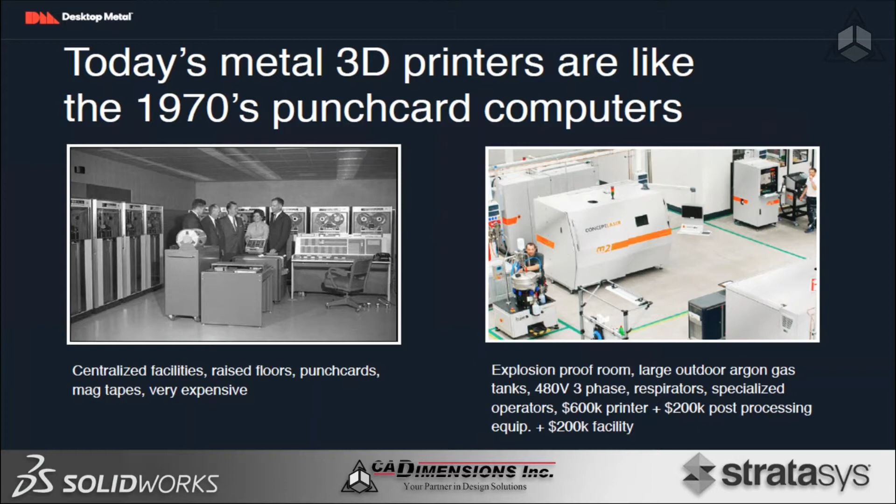So Desktop Metal was a company that was really started to take on these challenges, to be able to offer something to the manufacturing world that wasn't available currently today. So when they looked at the main challenges facing the metal 3D printing world, it was broken down into 4 different areas.

The first is the high cost of acquisition or ownership. If you're not aware of metal 3D printing, the current systems, which are primarily based off of direct metal laser sintering process, are very expensive, starting out in the $600,000 range with many third-party pieces of equipment that easily get a customer up into the $1 million price point when all said and done. Not only is it a high cost of acquisition, the powders used in the metal sintering process are very specialized, so they have a high cost of running these systems as well, which limits access for other companies to be able to start running this type of equipment.

The next area is the long and in-depth learning curve. Once you get the equity to purchase one of these systems, it takes a novice user quite a long time to become proficient in running this type of equipment. From our conversations with users out there, it's up to 1 year for a new user to become well-experienced enough to properly run a DMLS system, getting consistently solid, good parts off that machine. So for a corporation thinking about buying a metal machine, once you acquire it, having a user up and running is going to take quite a long time before you're seeing the results you expected.

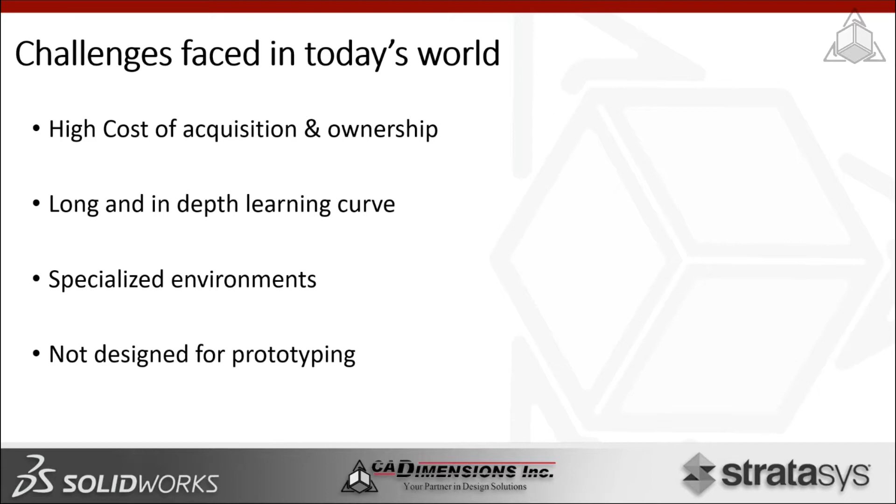So when Desktop Metal looked at this, they felt that metal 3D printing has barely scratched the surface of manufacturing. Looking at the systems currently out there, they're too industrial and expensive for the prototyping needs of a lot of companies, so they end up relying on either plastic prototypes or traditional CNC machining of metal parts. And the current systems aren't fast enough or low enough cost to be considered a good option for larger production runs.

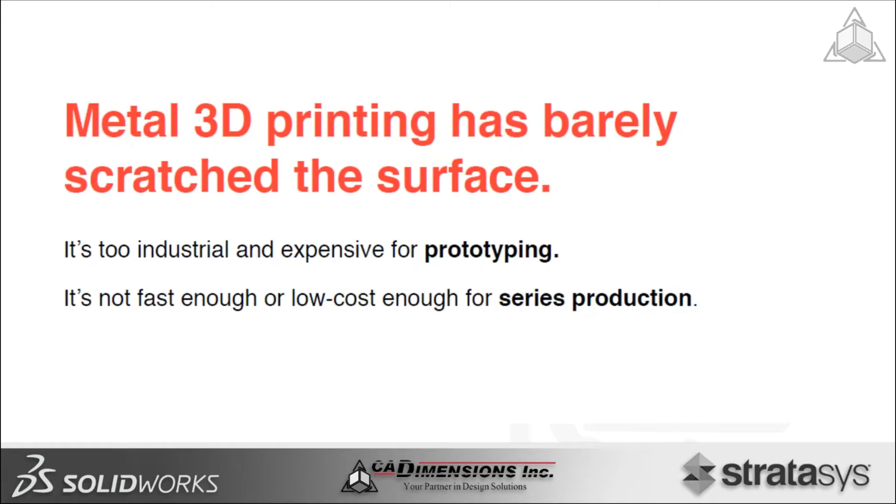So to give everyone a little background on Desktop Metal, if you're not familiar with them, they are based out of Boston, Massachusetts. They were founded in 2015, and the leaders of the company founded it because they wanted to make metal 3D printing more accessible for manufacturers. They felt there was a big need in the 3D printing market for a system and technology that was more accessible than just to large corporations who have the dollars and manpower to run some of the larger metal systems out there today.

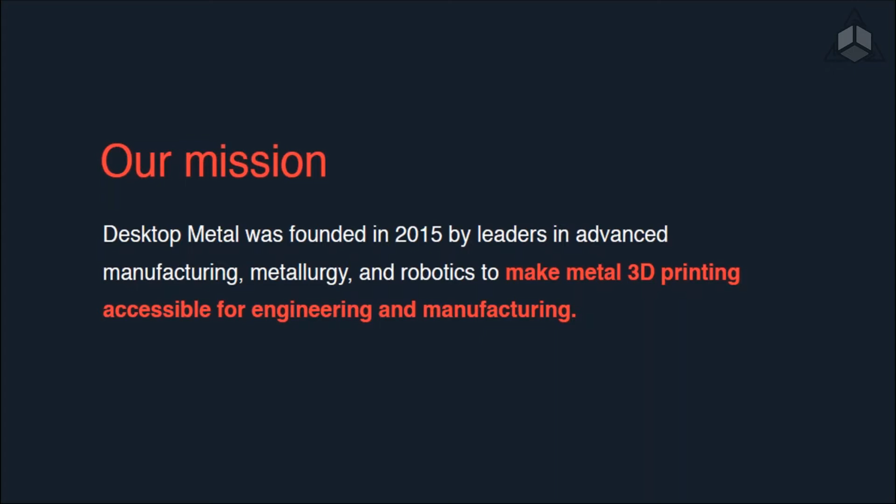Since 2015, Desktop Metal has had over $100 million in investment to bring additive manufacturing metal into the mass market. You can see they've had quite a few large name investors from Google to GE. And one of the other investors not listed here is our other partner in 3D printing.

That partner is Stratasys. Stratasys was one of the original investors in Desktop Metal, and the founder and CIO of Stratasys, Scott Crump, is actually heavily involved in working with Desktop Metal on their development.

As a company, Desktop Metal actually has over 100 engineers right now, 14 PhDs, including 4 MIT professors. If you get on their website and look at their founding partners, you'd think it was a requirement to have started and gotten an education at MIT to be part of that team. Some very talented professors and people running this new startup. And they have over 138 patents in process.

Over the last couple of years, they've been working tirelessly to develop a new technology that was going to really change the game when it comes to metal 3D printing. Their overall goal is to be able to provide companies with a true resource and a machine that they can use for their prototyping needs when looking at metal components.

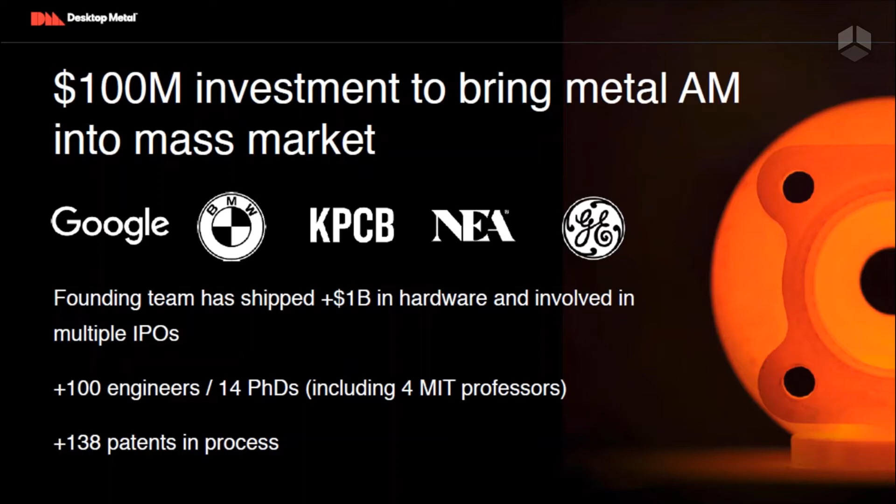The two systems that have been announced and are planning to come to market in the next two years: the one on the left, which we'll talk about first, is the Studio system. This is the system actually launching this year. It was announced at Rapid in May. For those who attended, I'm sure you saw some of these systems in action there. I'd say it was probably the only metal 3D printing company that had a system running at Rapid, so that's definitely one thing to talk about.

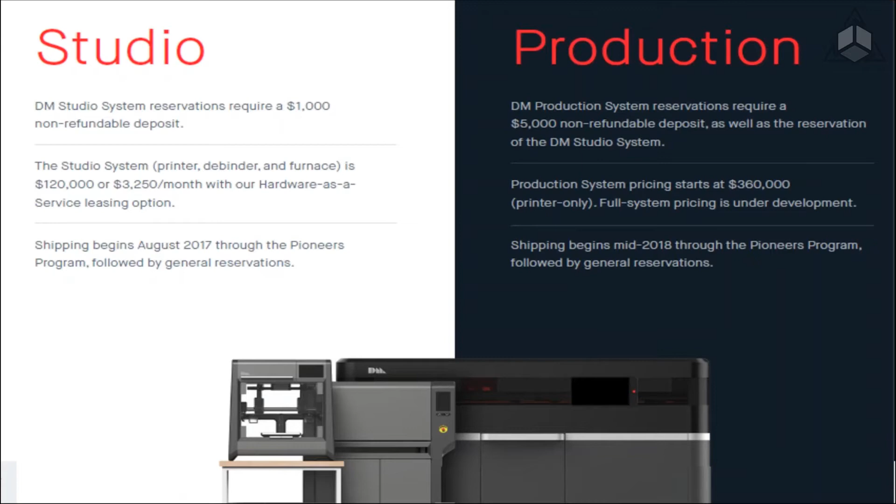The first one we'll go through is the Studio system. Again, this is the product released at Rapid. They'll be shipping this system in August. CADimensions is going to have one of these systems around the August to September timeframe in our Syracuse office. So if you're around the area during then, please feel free to give us a call and stop in. We'll be able to show you everything involved with this technology.

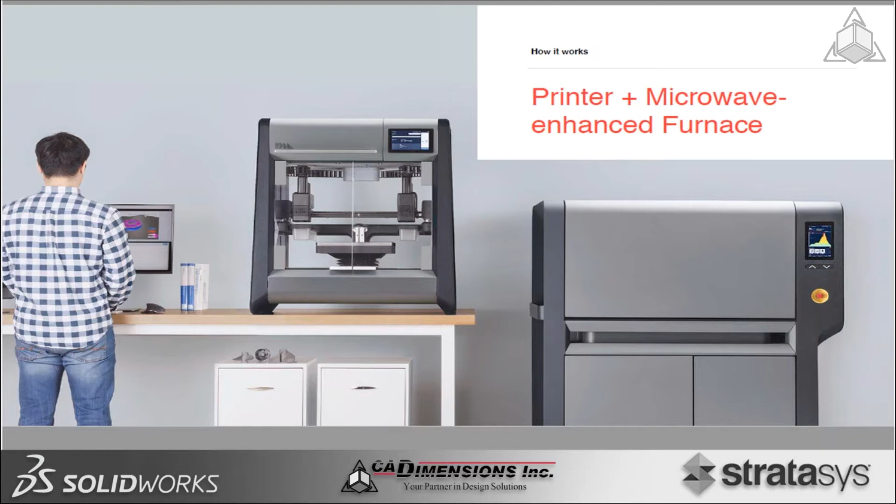The Studio system really involves several different components. You have the actual printer, which sits on that tabletop there, and then you also have a microwave furnace, used in the sintering process. These are sold as a complete solution, which is something a lot of 3D printing companies don't do — they don't offer a complete solution for a company to make one purchase that includes all the equipment needed to print and get their parts through heat treatment.

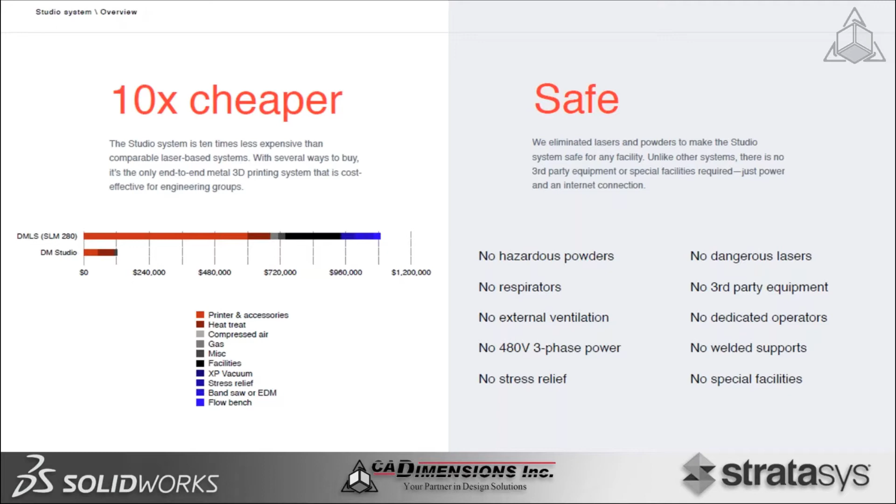More importantly is the safety factor. This technology does not use lasers at all, so it has no hazardous powders. It does not require any respirators. It does not need any external ventilation. It does not have any third-party equipment that doesn't come from Desktop Metal. It does not need a dedicated, highly trained operator, and it really doesn't require any special facilities. So overall it's a great type of system that can fit right into an office or lab environment without having to make many adjustments at all.

So to get a look at what the technology is, Desktop Metal's technology is really based off of the MIM technology, which is metal injection molding.

One of the interesting things about Desktop Metal is their support removal and the ease of being able to remove supports by hand, which is groundbreaking for metal 3D printing, because before this it was all done with machining. So we're extruding a powdered metal cased part, building it up layer by layer, very similar to the FDM process.

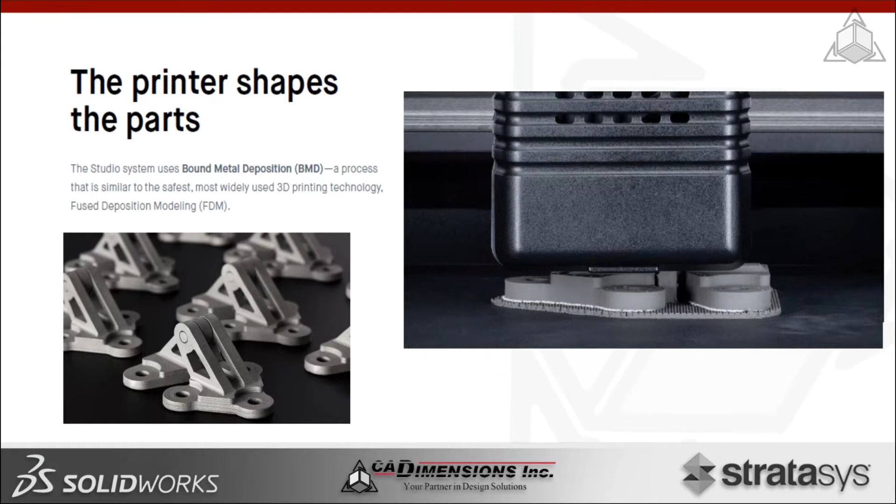The system itself is a sleek-looking system that operates with two heads: a model head, and a support or separator head, which lays down a thin layer of ceramic spacer material, allowing us to print and remove those supports by hand. It's safe and widely used like the FDM process, with very similar design guidelines, and overall has no safety hazards as far as handling powders. It's not like you're getting big vats of metal powder to worry about - they come in sealed containers in a rod form.

As far as build speed, it's very similar to an FDM system - we're looking at about 1 cubic inch per hour. The overall build area is 12 by 8 by 8. That's the build size of the chamber, but the actual largest part you can build is 10 by 6 by 6.

One of the things with the MIM process, if you're not familiar, is that the parts actually print out oversized by 20%. When they go through the sintering process, they shrink down to their net shape. So the build platform will be a little larger, but your actual largest part you can make is a little smaller, because you have to take into consideration the shrink factor that's going to happen later during sintering.

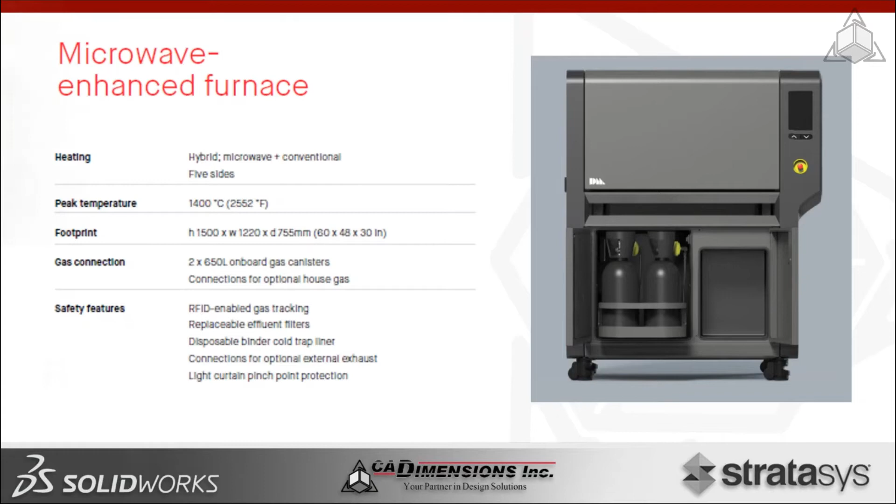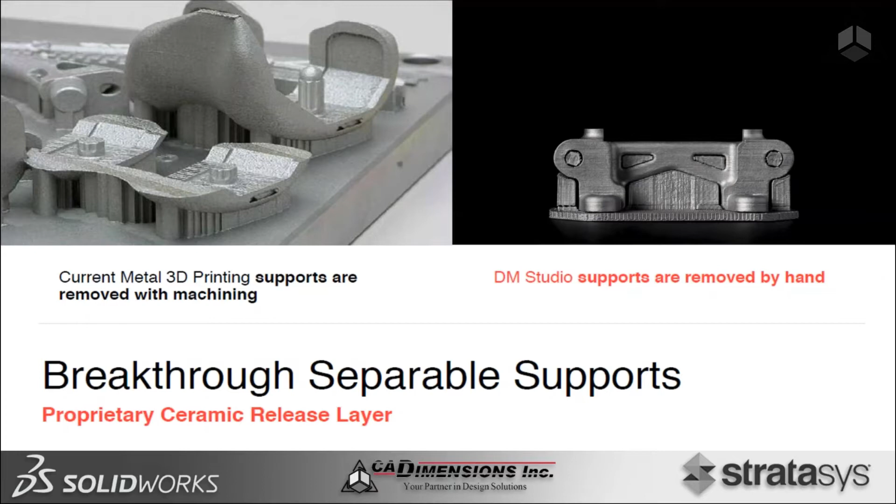After it's out of the furnace, you have a completely sintered part - we go from a green part to a brown part to a fully metal part. If you're familiar with current metal 3D printing, supports are typically removed by machining. You can see here on the left, the support would have to be machined off using traditional CNC machining.

Right here, we're going to play a quick video showing how easy it is to remove the Desktop Metal supports. You can see as he pops out those supports with a small screwdriver - that powder is the ceramic separator that has been burned away during sintering. This really allows you to remove these supports easily by hand, very quickly, which isn't possible with any other type of metal 3D printer.

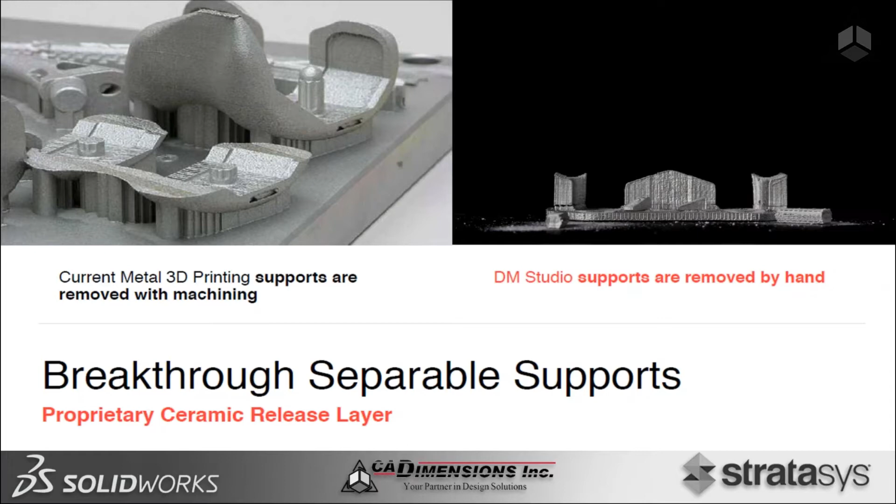So when we look at usability and ease of use, support removal is a very big concern with metal 3D printing, and Desktop Metal, with their Studio system, has come up with a fantastic solution to that.

So once the parts are done, it produces a near net shape part. Again, we're talking about the MIM process, where we're going to have a 20% shrink that's going to close those parts down to be the actual size. And that growth or expansion of that part is done in the software that you're processing these files in.

The software does take native CAD files, so there's no need for an STL file anymore. So you're able to take your SolidWorks, your Pro-E, or your Inventor files and put them right into the software, and it's going to make those adjustments as needed to take that shrink factor into account. As far as resolution and accuracy, you're going to have very similar resolution and accuracy to that of an FDM printer. We're looking at about 2 thou plus or minus as far as accuracy on these systems.

The densities are similar to metal injection molded parts, so they're actually not going to be solid. There's going to be some sort of porosity or sparseness to the interior of the part, and that is to allow both the heat and the binder spacers to be eliminated from the material itself. And the parts are going to perform similar to wrought alloys. So if you look up different types of MIM metals, you're going to be able to see that you can get those types of characteristics, and that is what you're going to see off of this type of machine.

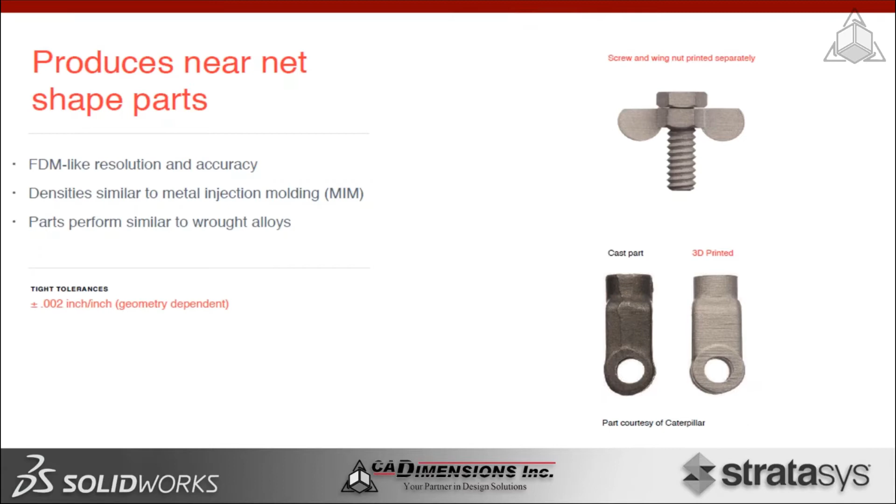So again, to recap the overview of the process, the one nice thing is the end-to-end system software controlled workflow. We're starting in a proprietary software from Desktop Metal. It's all cloud-based. It's going to communicate to your printer, which is also going to communicate to your furnace, which is going to automatically know how long it needs to heat up and keep for. So you're going to set up, you're going to print, and tool paths and everything are all automatically generated, very similar to an FDM, so there's not any tool path setup that you have to do.

It's then going to go into the debinder solution for a couple hours, and then it's going to go in the sintering furnace for 16 to 24 hours, depending on the thickness and the material itself. So overall, from start to finish, you're probably looking at 1.5 to 2 days from when you print a part to when you're going to have a part in hand.

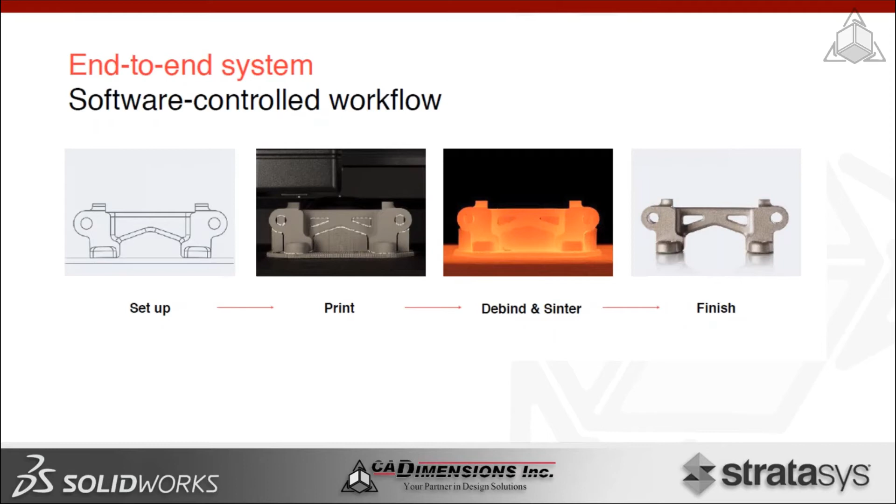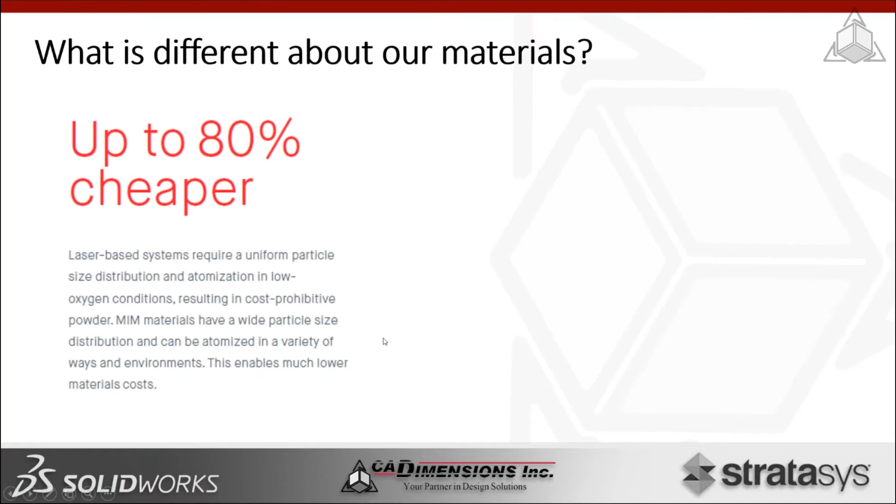So the materials, as I said, they're basing their technology off of MIM, so they're using MIM powders. And there's really a big advantage to MIM powders. What's different about our materials, if you compare them to the current materials used in DMLS processes, is ours are 80% cheaper. And it seems weird, right? They're both powdered metals, but what's the main difference here? Well, the main difference is their makeup. Laser powder bed fusion metal powder needs to be a very specific, high quality, uniform powder to be able to be sintered properly.

With the metal injection molding process, the uniformity of those materials does not matter, so we can actually use different types of metal powders that are going to be less expensive than if you're using a laser bed fusion system. So that is a real big advantage when you're looking at cost of ownership for a company, to know that the materials you're buying from Desktop Metal are going to be 80% cheaper than if you're buying them for a laser bed fusion type system.

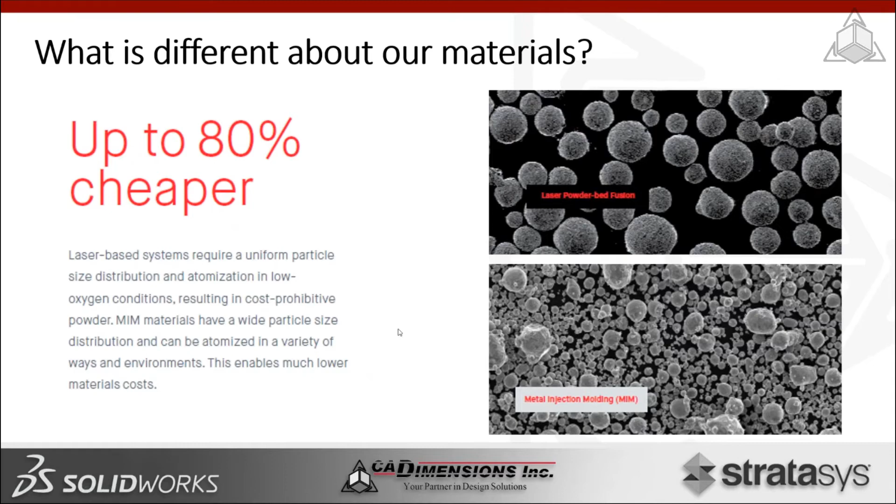Looking at the materials that are currently available, there are actually over 200 different types of MIM powdered metal materials. These 6 right now are the ones currently available on Desktop Metal machines. They are working to grow that number to upwards of about 30, and they're looking at areas where customers are going to be demanding those types of metals to be developed the most.

So right now you can see that we have a 316L stainless steel. We have a 4140 low alloy steel. We have a 17-4 PH stainless steel. We have a copper. We have a Kovar F15, and then we also have a tool steel. And since this, they have actually developed an Inconel material as well. So there are currently 7 materials that they're offering on these systems.

So again, you can see the way the material comes in its shape. When I talk about a pixie stick, it does kind of look like a pixie stick in the fact that that is very compressed metal powdered material that's put into a very thin casing of plastic, and then it's put into the machine via these canisters. So when you're changing out materials, you're just changing out the head and you're changing out the canister.

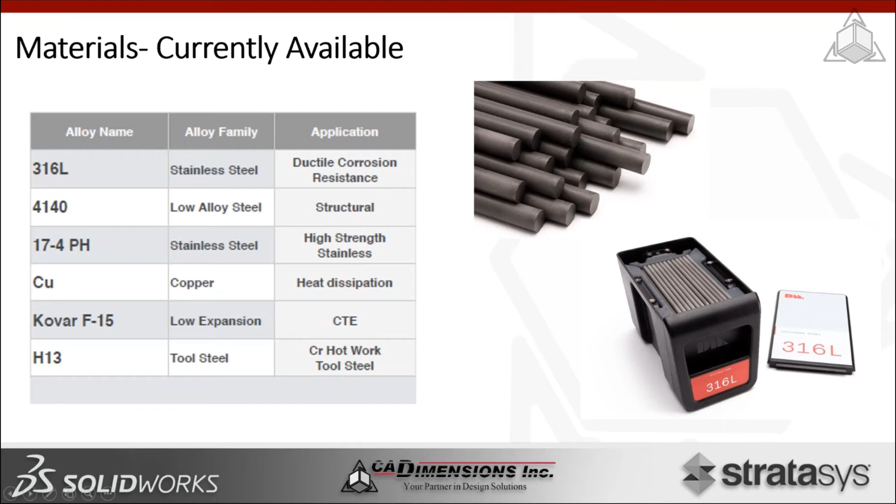So for those of you who run FDM systems, maybe a Fortus, it's very similar to doing a material change over there, where you're taking out a cartridge, you're changing out a tip, and you're putting in a new cartridge and a new tip. So the process is very easy, very clean, and very office friendly. So that is currently the studio system.

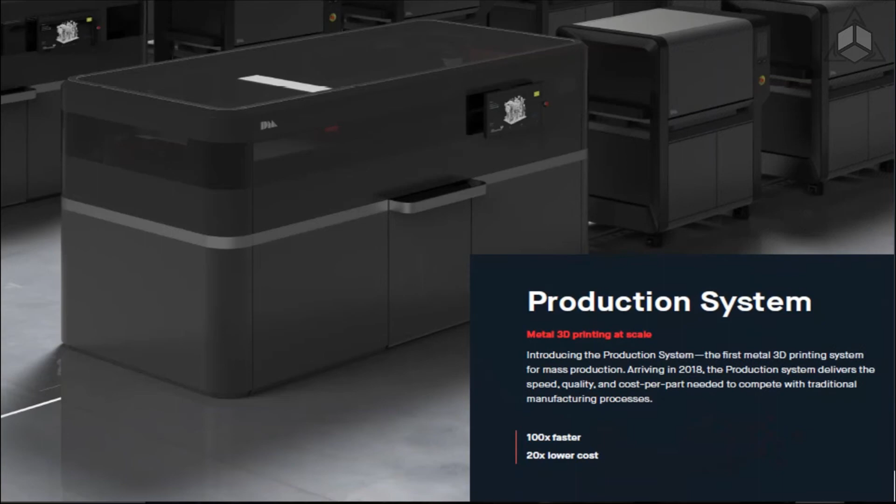So the next system we want to talk about is the production system. This is a system that is set to be released later in 2018 to 2019. And this is really a different type of metal 3D printer. This is a larger scale 3D printer. As you can see here in this rendering, it's a very large system with several furnaces involved in it.

And this technology is being powered by single pass jetting. So really what they did here is they took a combination of binder jetting and inkjet processes to create this type of workflow. This system is a 13 by 13 by 13 build volume, so it is printing in an entire bed of powdered metal. Similar to the powdered metal on a DMLS machine, but this one is MIM powder. So again, you're still getting those cost savings with the reduction in the metal powder cost.

And what this machine is doing is it's all about speed. This machine is going to be 100 times faster than any other laser-based system out there. What we've learned is that this can build its whole build volume within 6 hours. So a 13 by 13 by 13 inch build volume can be built in 6 hours. So really this is going to be used as a production system.

For customers out there who are looking for a replacement for maybe casting, who want to do low to mid-volume production parts, this is going to be a great opportunity for them to get involved. Again, the 20 times lower cost is going to be based on the ability to use that MIM powder.

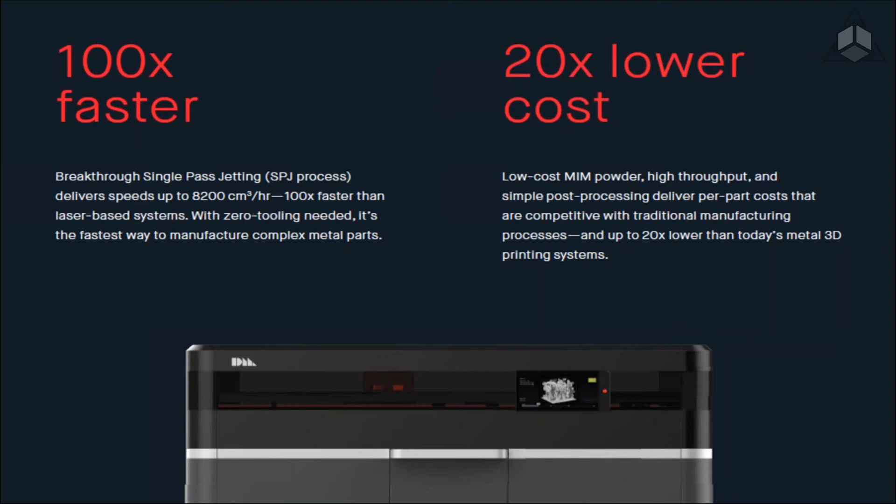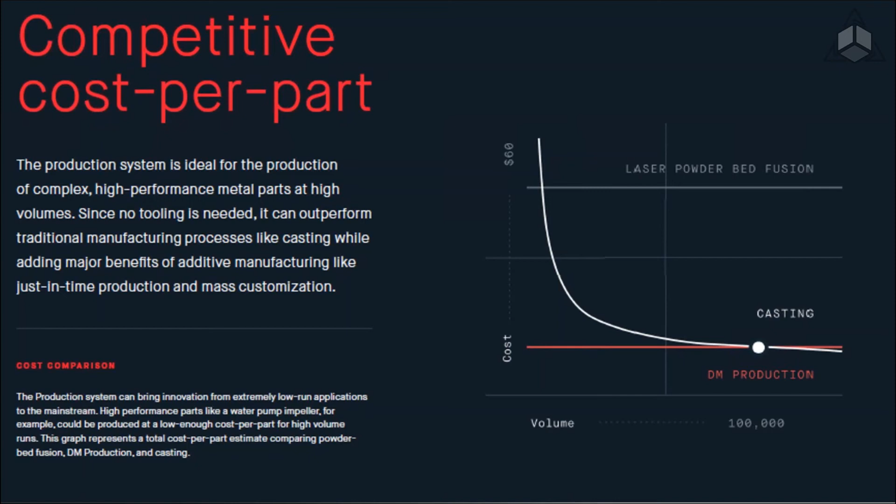And if you look at competitive cost per part, you can see the cost per part for laser bed fusion, and for the Desktop Metal production system, and you can see that at about 100,000 parts is when we would be matched up with the cost of traditional castings. So any company that is looking to produce high volume parts of maybe 1 to 100,000 components in a year, this can be a great answer when you're looking at a new solution to manufacture those products.

So a quick summary of some of the things that we covered. The Desktop Metal Studio system is going to provide the manufacturing world with the first affordable system. Everything you're going to need with this Studio system is going to be $120,000. That is really groundbreaking when you look at the overall cost of traditional metal machines, and it's going to open up the door for a lot of companies who've had the desire to get into metal prototyping to have access to this type of equipment.

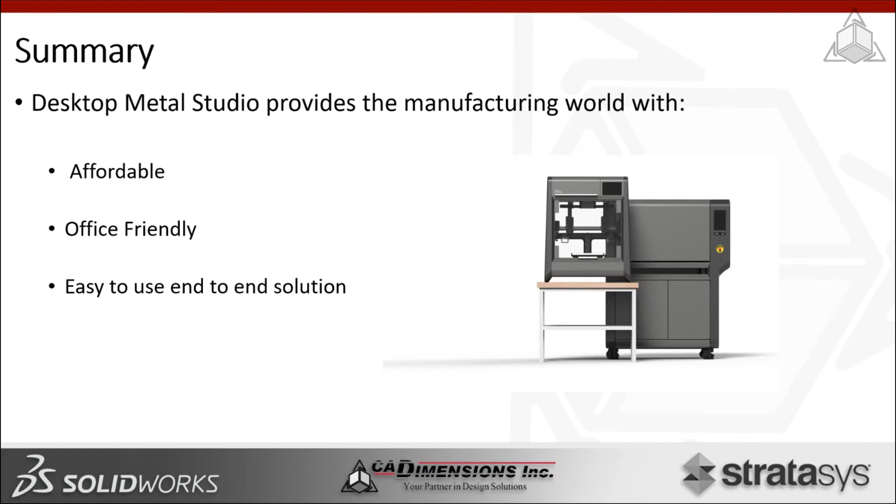It's office friendly, so you're not going to need any specialized facilities to run this equipment. It's going to fit right into any type of lab or manufacturing environment that you currently have. And it's a very easy to use end-to-end solution. For those of you who have been using FDM style printers, you know how easy they are to run. You're going to have a very similar experience running this studio system.

So some frequently asked questions that we do get. So how much does the studio system cost? Again, a full-length solution is going to be $120,000. And what that gets you is the studio system, the microwave enhanced furnace, and also the debinder station. So everything that you're going to need as far as equipment to run a Desktop Metal system would be in for $120,000.

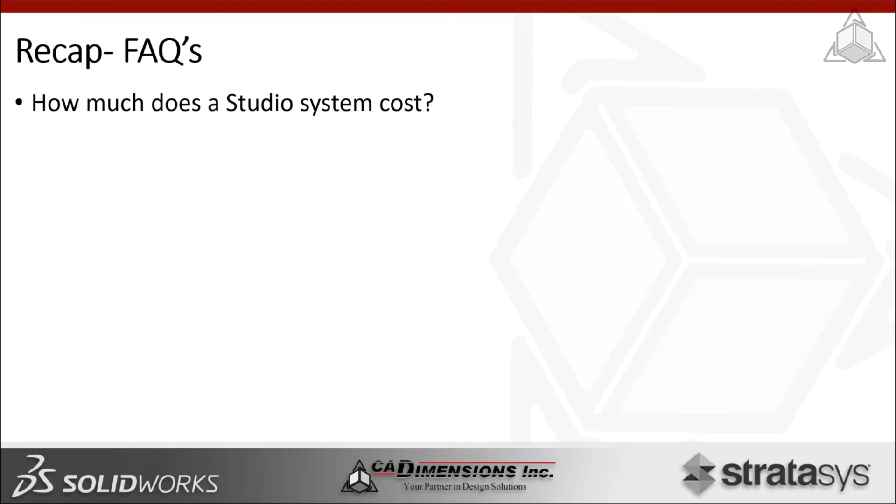And we also have another program where you can pay $3,900 a month with options to buy out the system at the end of it. When is the system scheduled to ship? The studio systems are scheduled to ship to the general public in September. So they are taking orders now and taking reservations. Obviously, it is a first-come, first-served basis. So if you are interested in it, please let us know. We'll be happy to talk to you more in detail about what you're looking for.

And the production system will ship to pioneers or first customers in mid-2018, and then will be available to the commercial world in 2019. What materials are available? So again, like I said, there are 6 materials currently available. We have 316 stainless steel. We have 4140 low alloy steel. We have a stainless steel, 17-4 PH. We have a copper, a Kovar F15, and then we have an H13 tool steel.

And this is just the starting point for Desktop Metal. With 100 engineers and many PhDs and many metallurgists, they're out there trying to develop and work on more and more metals that a lot of customers are going to be able to use and fit into their current prototyping process.

And can you schedule a demo? Absolutely. As soon as CADimensions has its system on site, we'd be happy to have any customers who are interested in coming and visiting us and taking a look at the system. As soon as we have our system, we'll be sure to be blogging and letting everyone know about it. If you want to see a system sooner than that, Boston is not that far away, so we certainly can schedule some time for you to go out and see Desktop Metal and its office and see everything in action.